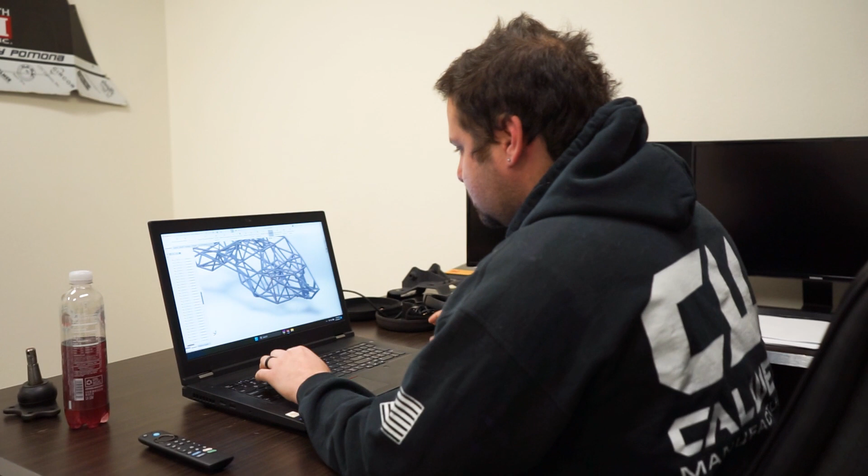So we are working on our 6100 chassis design, and this is the first one we've done. Pretty excited about this. We spent a lot of time just working on the geometry and getting the pivot points all correct, but now we're kind of at the fun part.

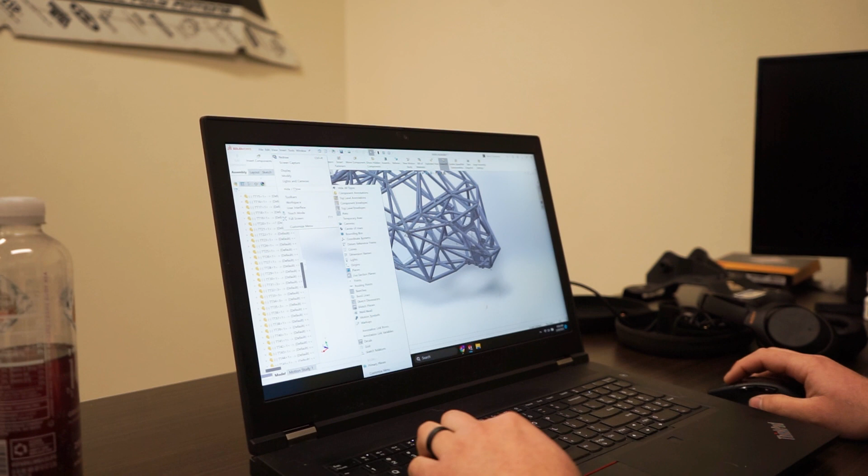After we got all that done, now we're just lacing material from point to point. Right now one thing I've got ready is this front bulkhead's all complete. It's really important that I go through on the computer and dial in everything I can so we don't have to do it out on the floor.

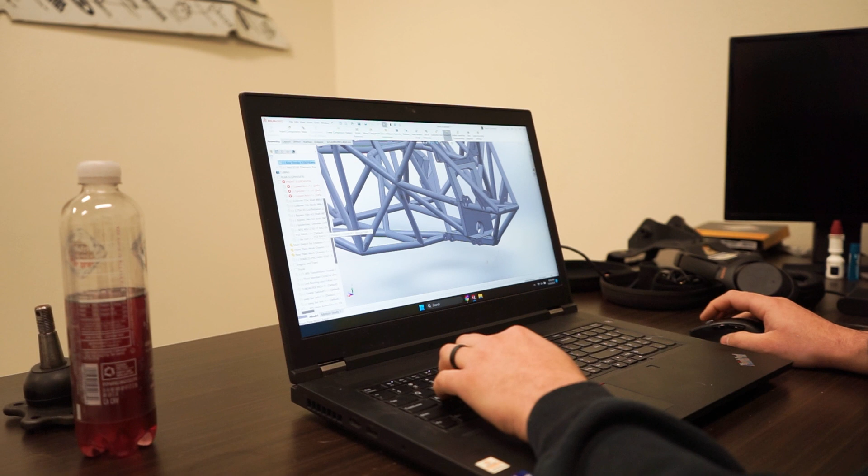So this is the front bulkhead area. This is our bulkhead all together, so we're pretty excited about that. We integrated some washers that are machined and will be hardened, so we can replace them if need be. These will be welded in.

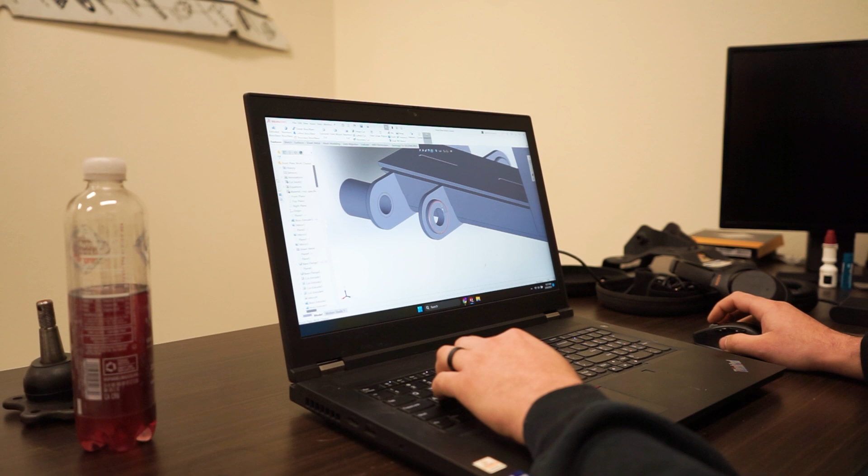Going into the back, we've got our shock mounts here, and our link mounts here, which were pretty tricky. We got some compound angles in here, just trying to make it easy to build but also strong, and it has a point.

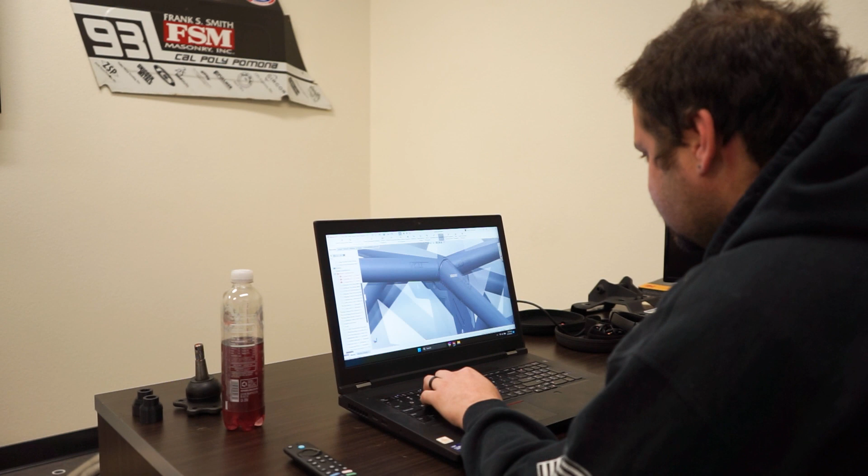Working through getting all the tube laser, getting ready to laser cut. I got all the part numbers on it, I've got everything normalized, coped around it. Here's some miters, we got a gap here, and a plate that's fitting in there, so we have a proper miter joint.

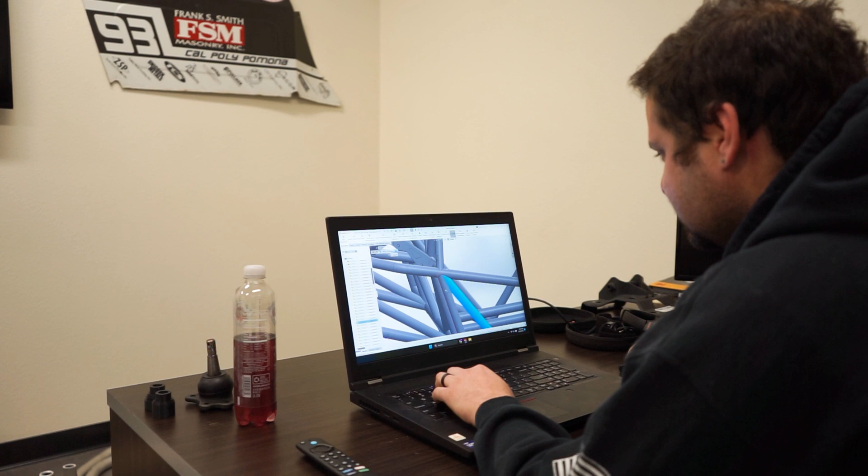So you can kind of see I'm still working on it. I haven't got all this notched yet, but that's my goal today. Pretty excited to get this done, and Van's gonna help me out with the fixture. We're gonna get it up on the chassis table here soon and see how it comes out.

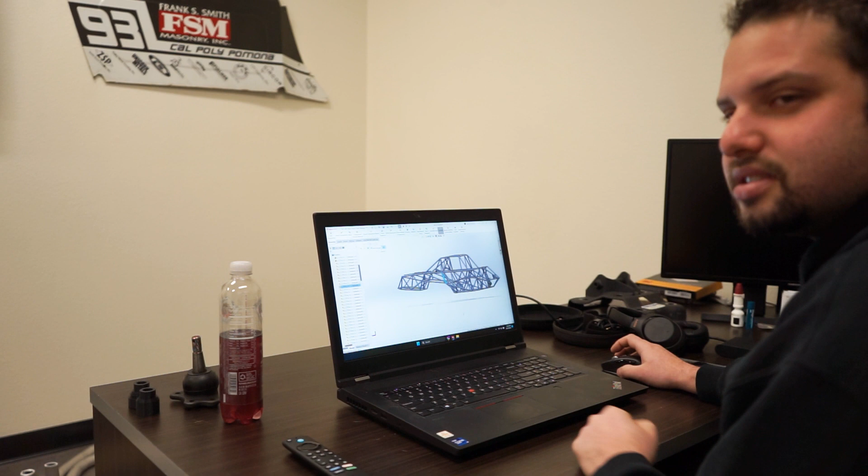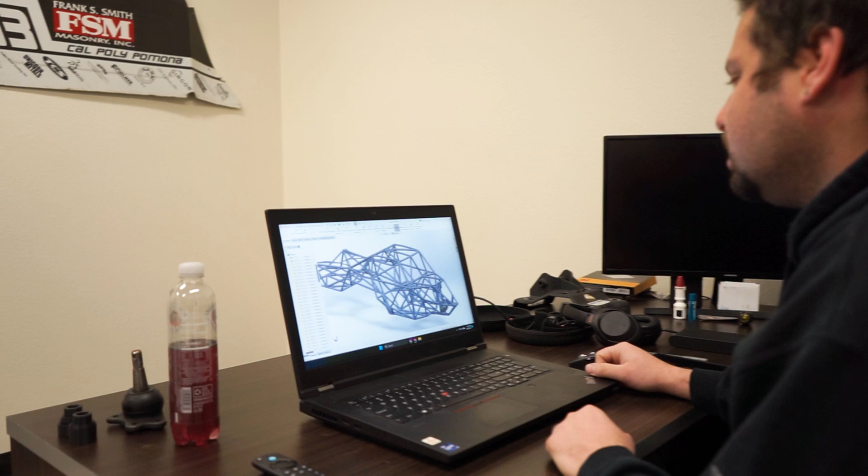Nice, how many hours do you think you have into it at this point? So before even the tubing's on there, just 2D sketches and 3D sketches, getting all the points right—I don't know, probably 100+ hours just getting everything where it needs to be. We've changed it like 5 times, but now that we have all that stuff finalized, all the pivot points, the shock points, and all the geometry dialed in the background, now we just fill in the gap. Really, this part didn't take too long.

I probably have about a week into this, and hopefully today will be the last day. I've got to get it all dialed in. I've even got—let me show you here.

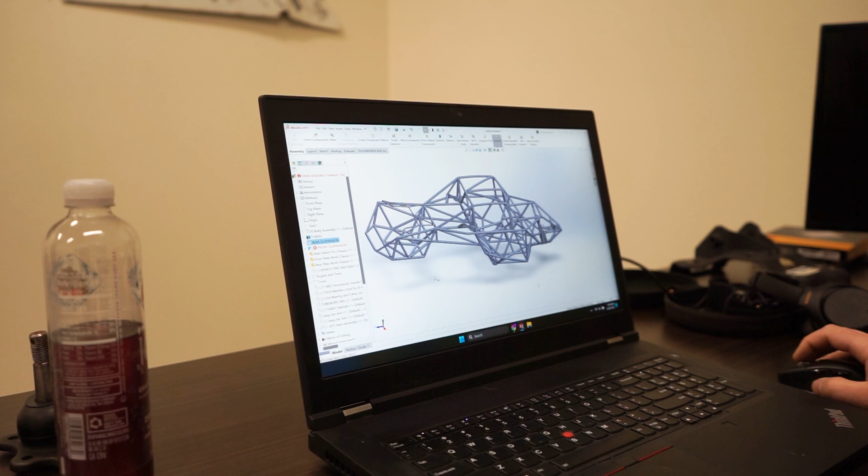We just have some mock-up rear suspension, just making sure we have the ability to have clearance. We got our Fox shocks in here, in that shock mount. Want to keep everything nice and simple, but strong.

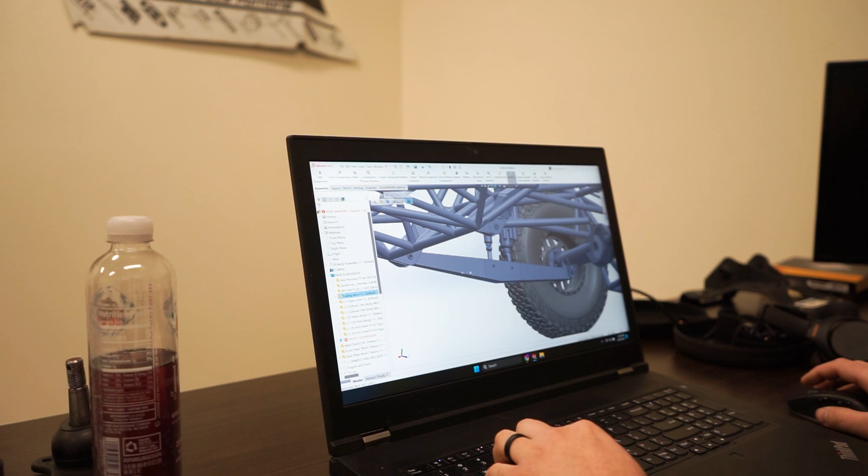Got some overlay plates that we put in, and just have a mock-up link. We have our actual link, but once we make sure all the lengths are good, we'll finish the design on the regular link and stick it in here. Some machined pickup points on the axle.

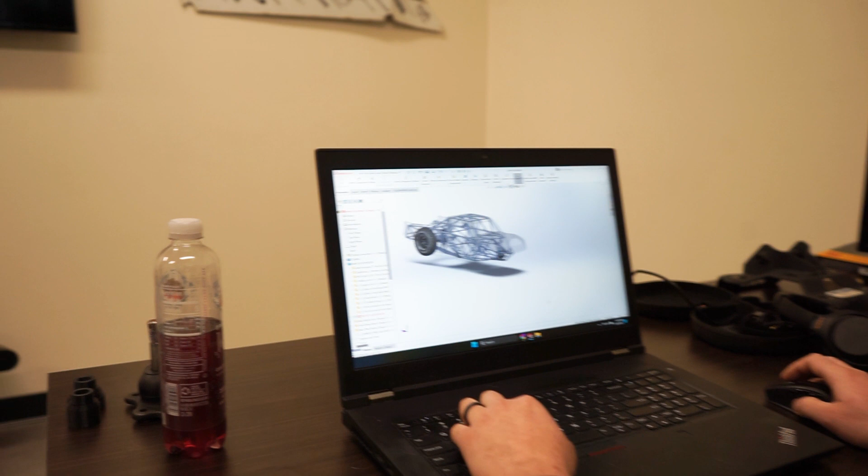You can kind of see the way we started with this—we had a Fiberworks body that we bought, and you can see the transparency there. We built it inside the body as a starting point. So it's pretty cool, we can check out how the tire tucks in there, does it clear, and then we make this transparent. We can kind of see the cage fits inside of it so well.

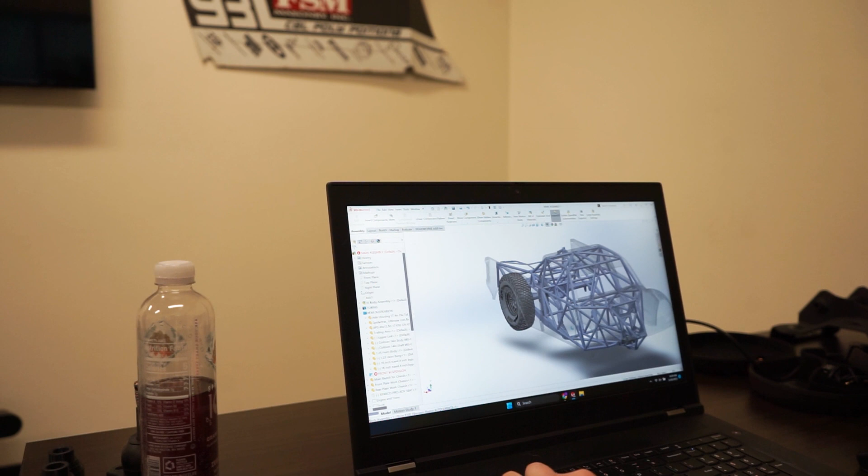Our future plan is to make our own body, but we wanted to have something to start with, and figured this would be a great jump into being able to build it. Eventually we'll develop our own body and go from there.

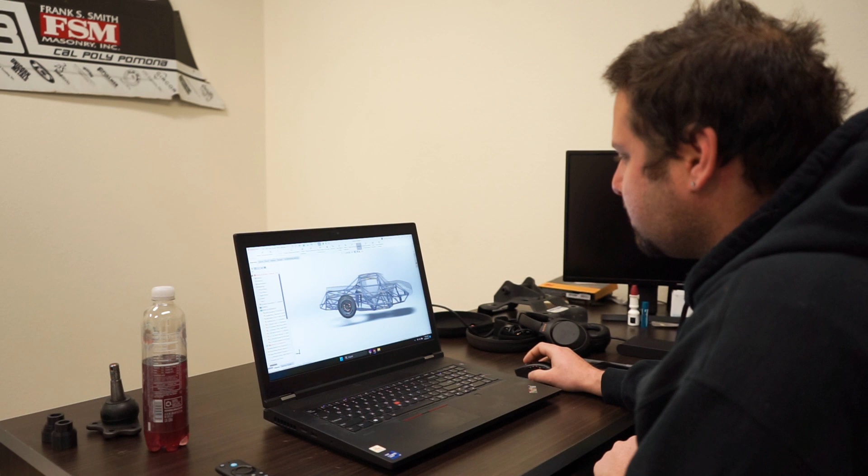It'll be cool—the bodies are tricky because you have to start with a giant block of foam and have someone make a mold. We're not a body shop or a fiberglass shop, so it'll be pretty interesting when we get to that, the learning curve behind it. We'll team up with someone to figure out how to make the body, but for now we're gonna use this Fiberworks Raptor body, and we're pretty excited about it.